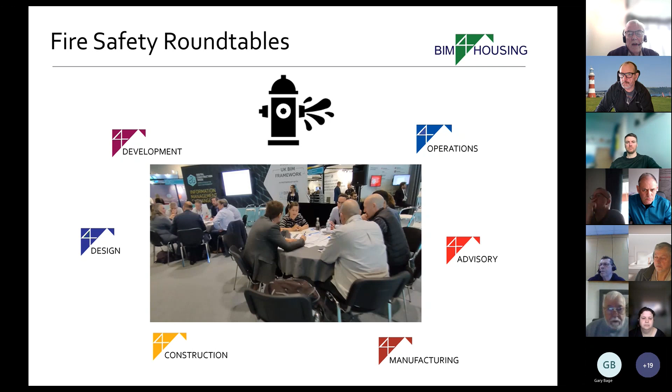The way we go about that is we've been holding roundtable workshops over the last 18 months or so. This is one of the in-person events we did at Excel last year. In each group, they were discussing a particular scenario, and through that we've produced publications for AOVs, cavity barriers, fire dampers, and fire doors.

So, a fire door one - this is one of the examples that some of you in this meeting will have contributed to - is a definition of what a fire door is. Also, from the risk perspective, what risk is it mitigating? Then what do people do to it to stop it from working? And then what data do subject matter experts like you say should be being collected during the different stages, in order that we can demonstrate that the building is safe?

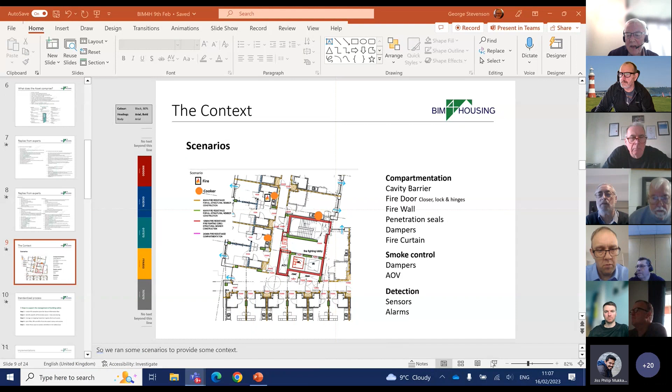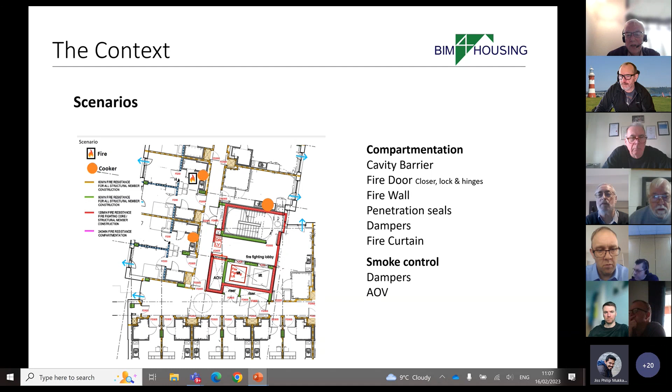So the point about this is that the fire door inspection itself needs to be done in the context of the whole of the compartment, and even if that compartment works perfectly, we need to make sure that the smoke control system works and also the fire detection system. For example, we've got a similar session to this one taking place next Tuesday on smoke control.

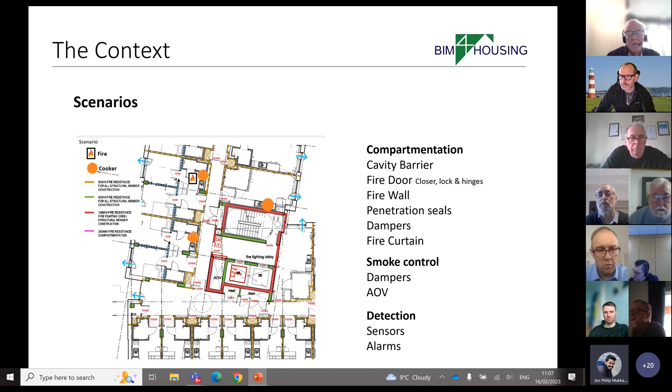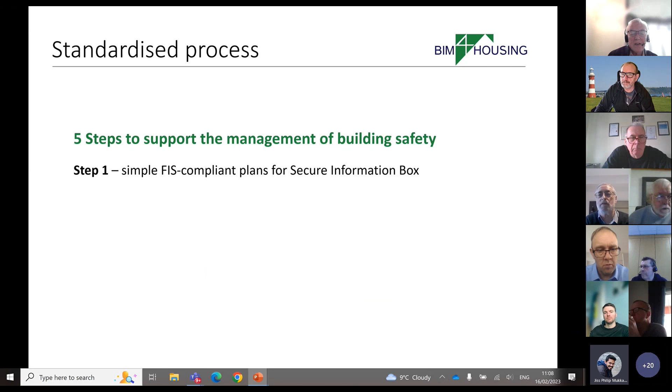So the methodology we're following is to say, first of all, one of the big drivers at the moment is getting drawings into secure information boxes, because that's part of the legislation for high risk buildings. Now, having done that - and that's where a lot of housing associations and councils are at the moment - the next step is saying, it's all very well saying where those assets are, but it's also a matter of saying what the specification is, and that's the major thrust of what we're trying to do today. We've then got the ongoing inspection regime, so that's group 4 that are working on that today.

There needs to be a mechanism for the landlord to be able to alert the fire rescue authorities of any key assets that have failed, and also relating those assets to the safety case going forward.

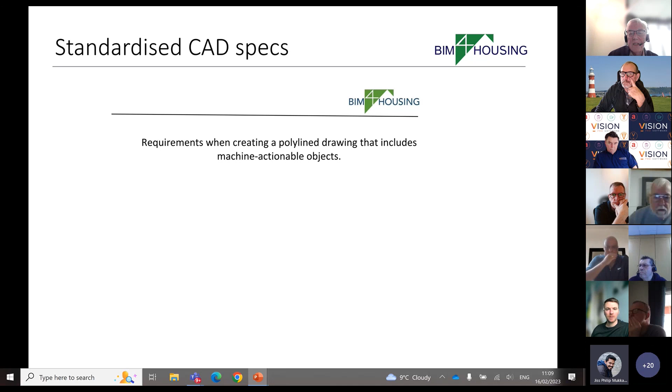That's the methodology we're following with a number of major landlords at the moment, to try and standardize things. We're working with some big survey companies that are going in and producing point clouds for landlords, but rather than them just producing drawings, we've created a series of standard objects.

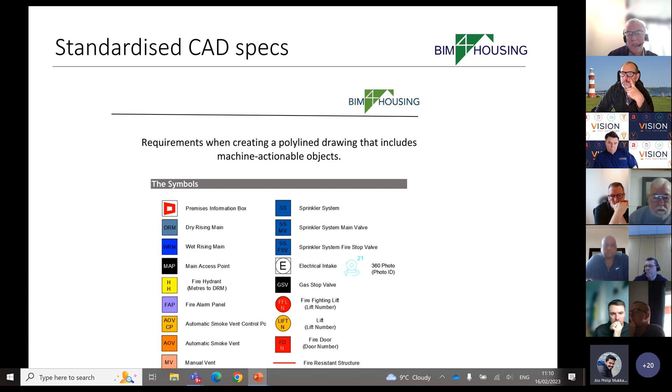Rather than just putting a symbol down, if they drop this CAD block down, it becomes machine readable. So afterwards, when you identify that something's a 60 or 30-minute fire door, that can be added subsequently to that initial base plan.

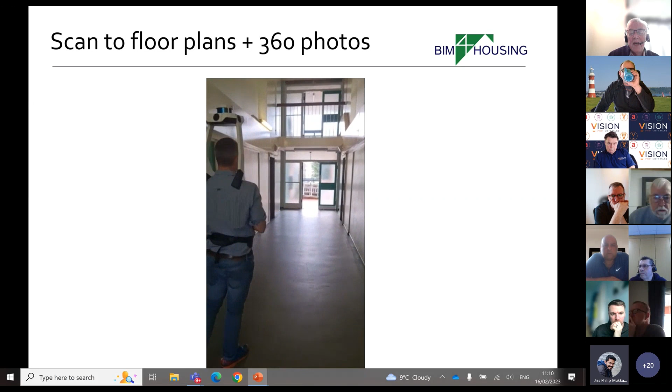We're using some cool technology for the surveyors to capture the information. At the same time they're capturing the information for the floor plans, they're also capturing 360 photos.

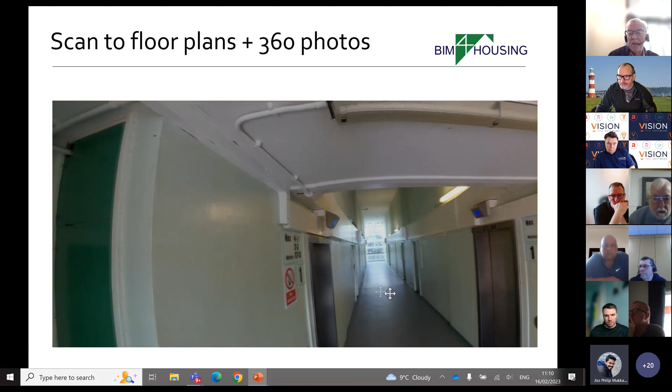So we're looking to use this type of technology to enable the inspections that you do to actually be tied back to something that they can then manage going forward.

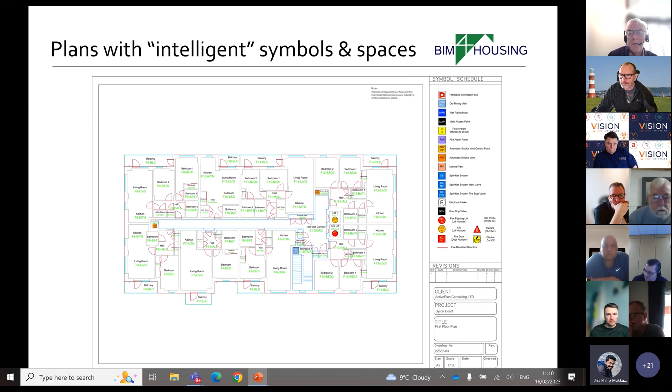This is just an example of the floor plans that have been created for Origin Housing, all from different surveying firms, but they're all using the same methodology and the same technology.

That brings us to a situation where, when you're doing your door inspections, you'll probably be using a range of different software applications to capture the data, maybe ZetaSafe or whatever.

What we want to be able to do is make it so the landlord has got something there that they can tie everything back to, irrespective of who's done the surveys, and then keep the information up to date, including what the products are. That's the journey we're going down.

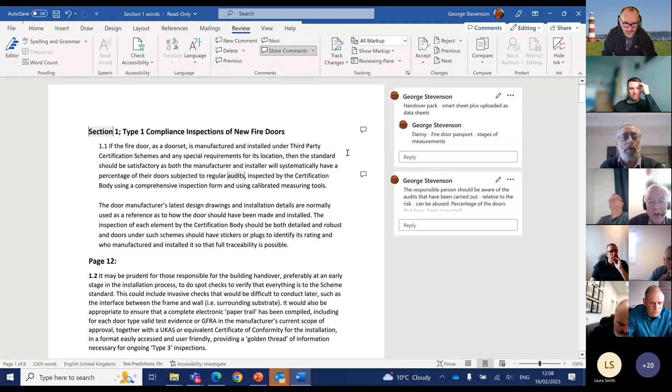The point that Sharon McClure was making was that this page here, the first page, up to the establishing competence, that's all really about making sure that the responsible party has got the right quality of information from whatever's being installed, not just fire doors.

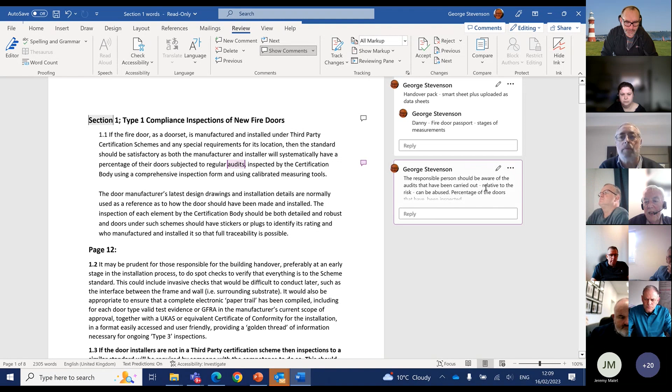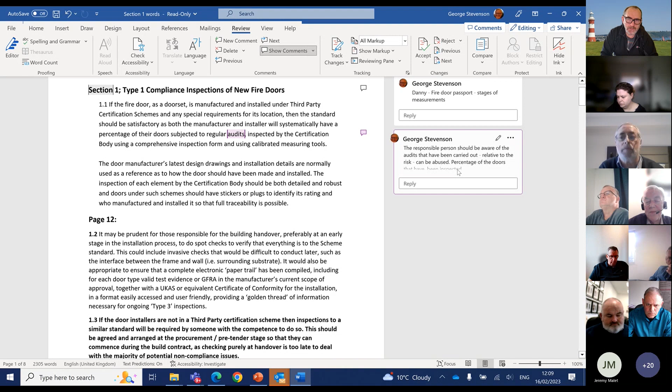So that's something we're concerned about, and also this regular audits thing, there's a concern it could be taken that having the regular audits, that's all fine, it's happening, whereas what Sharon was saying was that needs to be far more controlled. The responsible person needs to be aware not just that the audits have been carried out, but more importantly, how many have passed? Because that's an issue. No, that's a really, really good point.

And moving on from here, this is more about the individual checks, and I think Danny, from one of the door manufacturers, was saying that they've already got a passport process that captures this information for the landlord, which can then be inspected. So what he's agreed to do is go away and look at what they have in their passport to make sure it's covered here, and anything they cover that isn't in here can then be added in, which I think is a good way forward. So that's my feedback, and he's willing to share that.

So if Jim Hannon and others who are installing doors as well - I think Jeremy, you might have other checklists you use to do the validation, which I think we should be doing here.

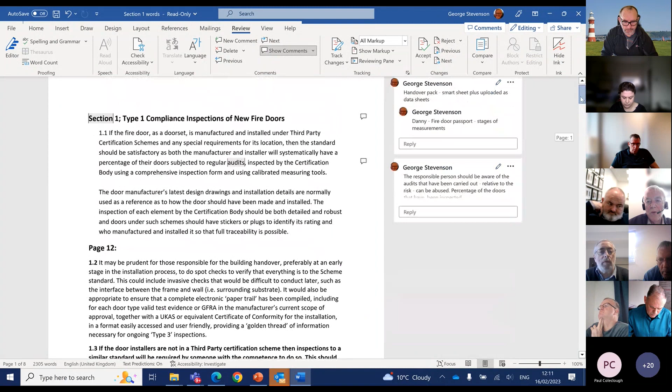The other question was, if the installer is a qualified installer, does the door need to be inspected by an independent? Can I interject on this, please? Yeah, sure. Sorry, Ian. It's okay, my hand's up, but please don't apologise.

On section 1, type 1, compliance inspections of new fire doors - the wording in there, if a fire door, as a doorset, is manufactured and installed in a third-party certification scheme, blah blah blah, effectively that's inferring that a third-party certified installation will generally be acceptable.

Now, I mean this with no disrespect to any third-party certified installer in this group, but I've been doing this job now for knocking on 10 years, and I've got 2 guys working under me who also inspect sites. When it comes to a new build site, a new installation, we are yet to visit a compliant new install. We have never visited a compliant new site, a new installation.

And as an interested body, but also a body with, I would suggest, some influence, I personally feel third-party certification is great, it's a step in the right direction. What we really need for fire, not just for fire doors but for any fire component, any critical component going into a building, is that installers should be individually qualified.

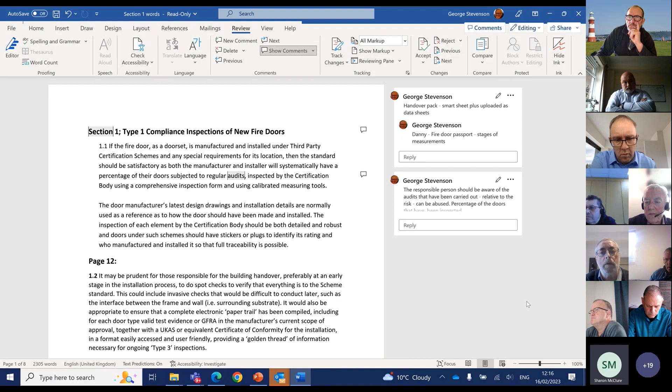Hi, Ian's comments, no one took offence, because the conversation we were having in group 1 was the concern that the document that's been created, if someone reads that, they're more or less saying that they've ticked a box because they've got a third party certified scheme member, and because there's been some, in inverted commas, audits, there's a false comfort that the audits will have given you the green light. And the perception versus the reality is that we are sitting on the other side of the fence. I'm a third party certified installer for passive fire products, and everyone was probably nodding their head to themselves when you were making that comment.

Anybody who's actually on the site knows where the deficiencies are. We are creating a document for people who are going to be sitting on the other side of the fence receiving these buildings. What we don't want is a statement at the beginning of any documentation that we've been privy to, leading people into that false sense of security. The third party certified schemes are not fit for purpose. The ASFP are trying to go through the whole skills, knowledge, experience, behaviour, and they're trying to have individuals competent as well as the management staff who are controlling their works.

And our conversation was primarily exactly as you said, and the work that needs to be done in all the properties just now across the UK, there's far more work than there are competent people to do that work. But the projects won't stop. The projects will proceed. What they may do is they may just take the people who are available to do those works. So the inspection regime becomes far more critical if that's the case, because there's not enough people who know what they're doing being asked to do the work that we are now branding as, quite rightly, life safety.

Brilliant, thank you, Sharon. Alan, we obviously want to get feedback also from Group 3 and Group 4, so just bear that in mind. You've got your hand up. Yeah, sorry, if I'm allowed to speak.